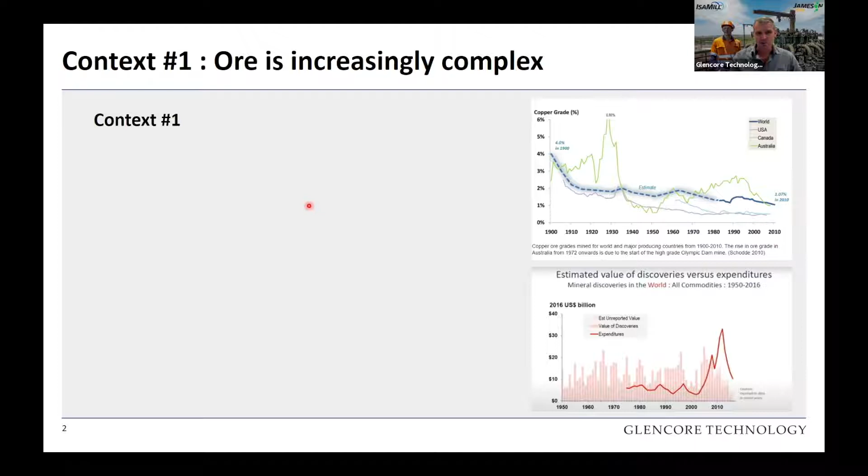We know that a lot of the easy, low or high grade accessible ores have already been mined or are currently being mined. What we also know is that the current stocks of known, undeveloped ore bodies are becoming more and more complex. If you look at this graph, you can see that since the 1900s, the grades of copper globally have been decreasing, and this is adding to the need to look at higher throughputs to try and maintain the same metal quantities.

We also know with this type of trend moving forward that the future will be lower grades, deeper and larger capacity, and also bigger footprints.

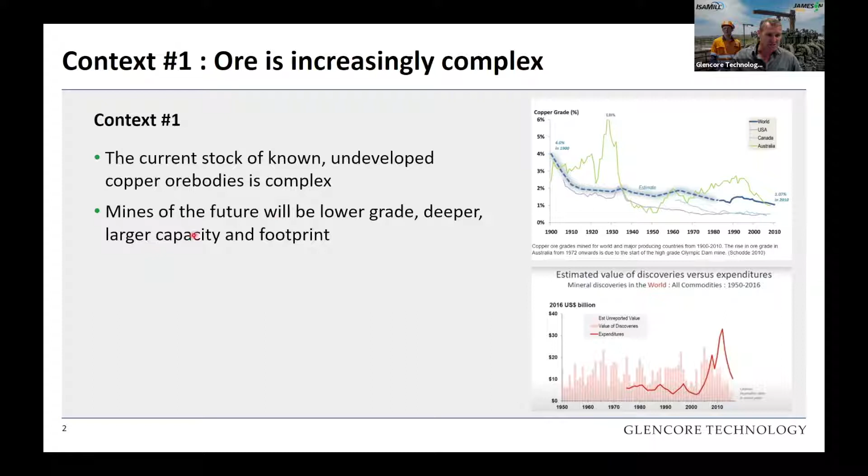We also know that the mining industry has capitalized on the rising metal prices, and with these larger plants, the higher prices often overlook the environmental and even the social costs. You can see here on this graph showing the value of discoveries in recent times - it's heavily depleting, and this also follows with the expenditure.

So what this also cements is that the problems we are facing in the future in mining are becoming greater and greater.

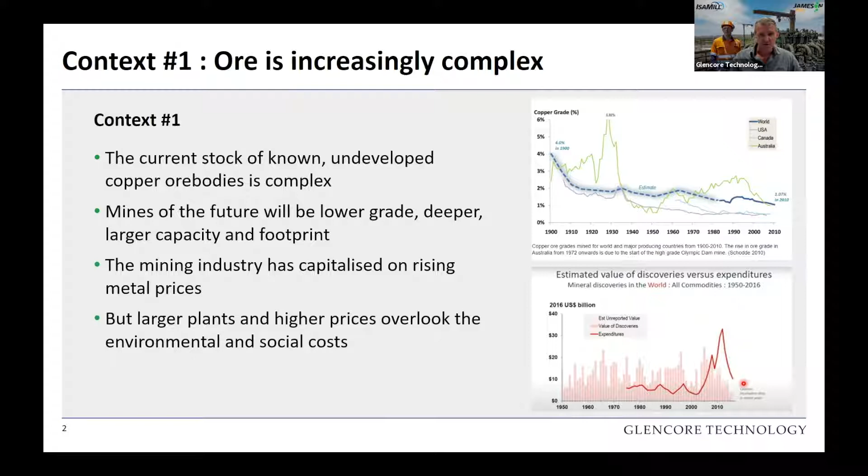The other point is there is a lot of pressure and trends in the industry to look at the environmental impact and also to reduce capital. A number of large firms such as the World Economic Forum and Deloitte have stated that there's a lot of pressure on stakeholders for less environmental impact.

Deloitte talks about the trend towards production in a sustainable way and also demand for environmental and safety performance. We know that since the lockdown from COVID, there's been a sharper focus on carbon emissions with predictions of up to 17% down in April, and also demand for less capital and less OPEX.

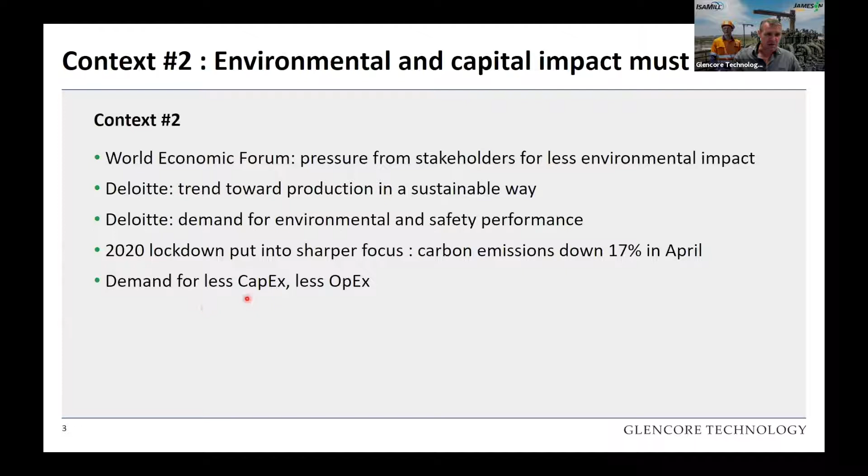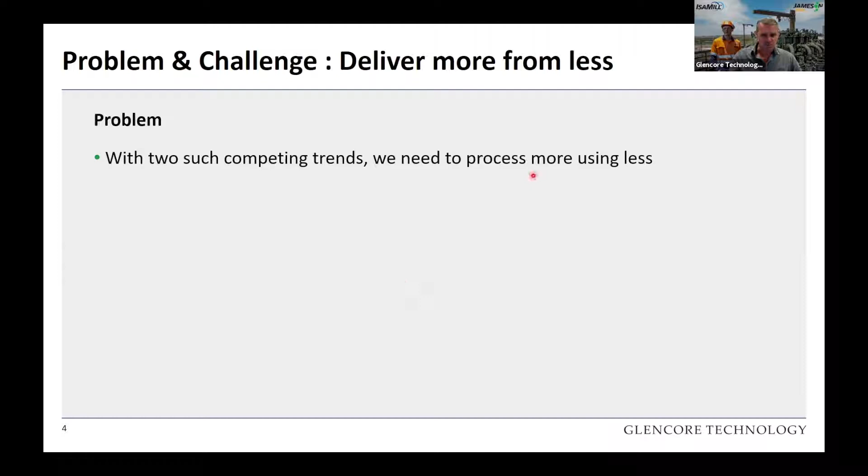So what is the problem and what is the challenge? The problem is twofold, and it really talks about the two trends I just mentioned, and also how we need to process more for less. So the challenge is to innovate the milling, flotation, and the circuit as a whole, and also to process the same or greater throughputs using less equipment and less energy.

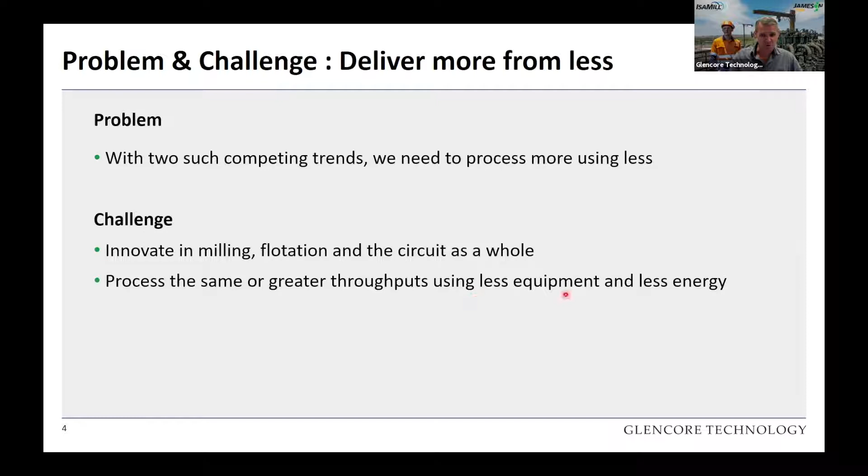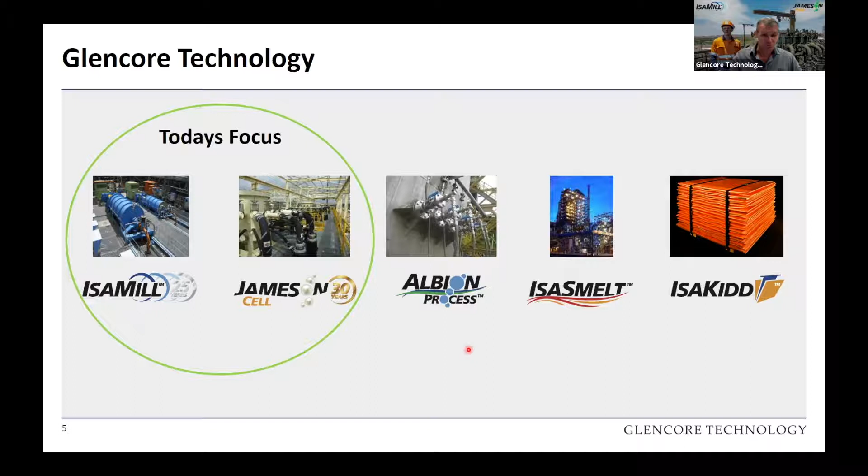Glencore Technology has been around for a number of decades, and we have 5 core technologies which we have been marketing and delivering into the mining industry for many years. The two that I want to talk about today are our mineral processing technologies, which are the IsaMill and Jameson Cell.

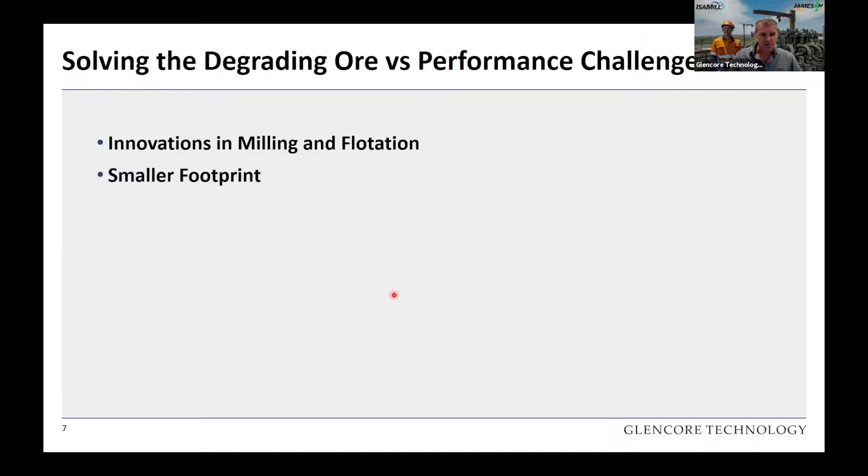So today we talk about the full circuit application and some of the innovations that we have now moved into. The first part is where we're trying to move to solve this problem, and this is around innovations within our milling and flotation technologies - looking at smaller footprint, lesser energy, and increased throughput.

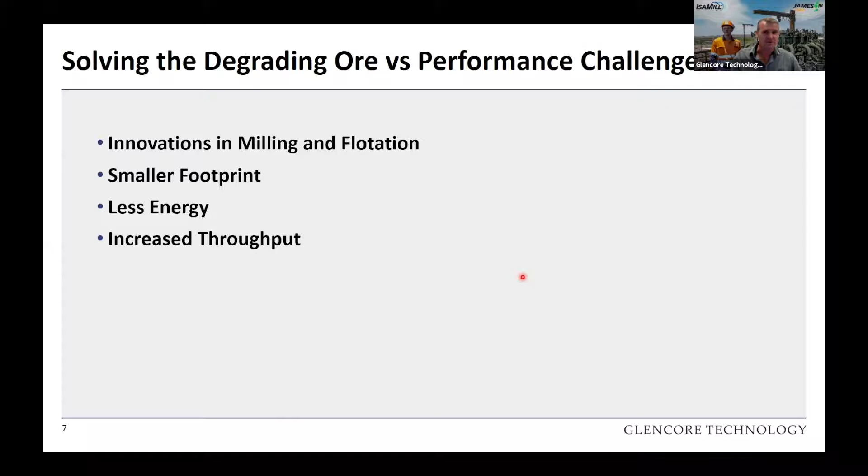So these are the types of things that we've taken on as a challenge to solve. How have we done this, and how are we now taking these things into practice? I'd like to introduce a new project which we have recently been awarded.

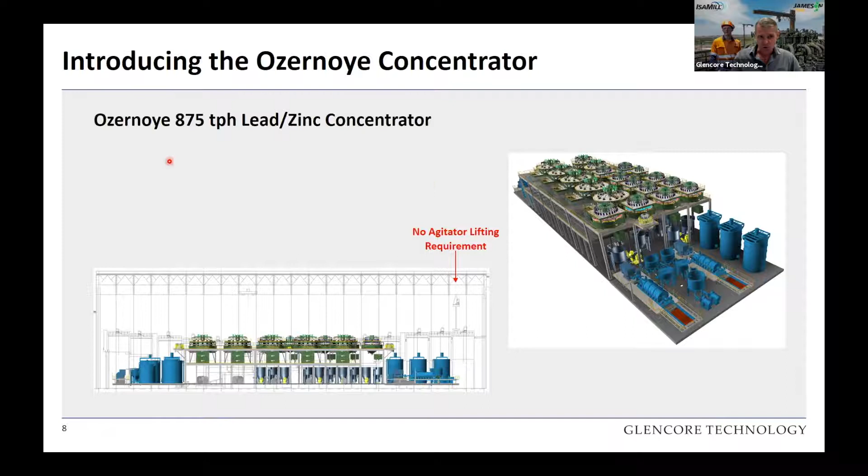This is a large lead zinc concentrator, 875 tons per hour in Siberia, Russia, called Ozernoye. This circuit is potentially the largest lead zinc operation to come online in the last 40 years, so it's a significant addition to the market.

It replaces 63 conventional tank cells with 19 Jameson cells, so it's a complete 100% Jameson cell circuit. It reduces the footprint by over half, and it also reduces the power by half.

As you can see here, these Jameson cells have no agitators, so there is no need for lifting inside buildings. This means the height of the building and craneage in this case was 15 meters lower, so there's a lot of savings, not just in footprint, but also in the height of the building.

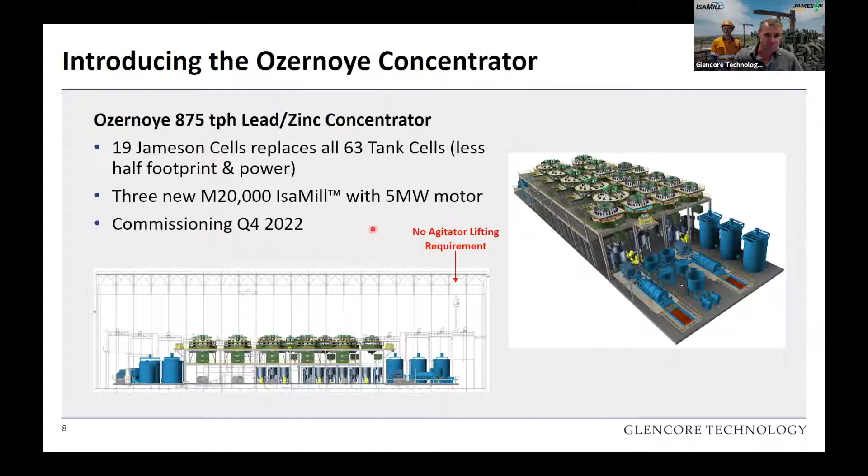Another big thing for this project is the introduction of a new IsaMill to our models. This is an M20000 IsaMill, and there's 3 supplied for this project, now supplied with 5 megawatt motors. This circuit will be commissioned in Q4 2022, next year, so it won't be long before you see this actual plant up and running.

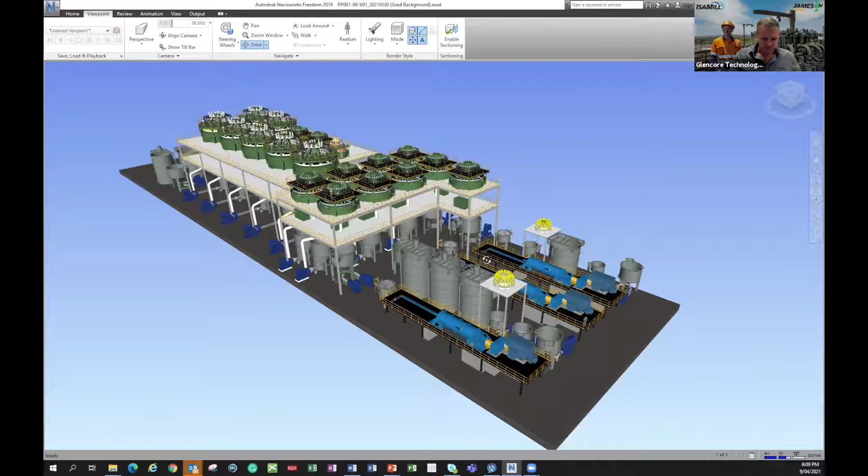So this is the circuit here. As you can see in the front, this is where the 3 M20000s are positioned. Towards the front end here we have the 2 rougher scavengers in the lead, followed by lead cleaning. And then we have 5 of our large zinc and pyrite rougher scavengers with a very high mass pull of around 55%, floating a lot of the pyrite out as well. Then the fine grinding goes down to between 10 and 13 on the zinc and 10 and 7 on the lead. The circuit in the back end here is basically the pyrite rejection and the upgrading of the zinc concentrate.

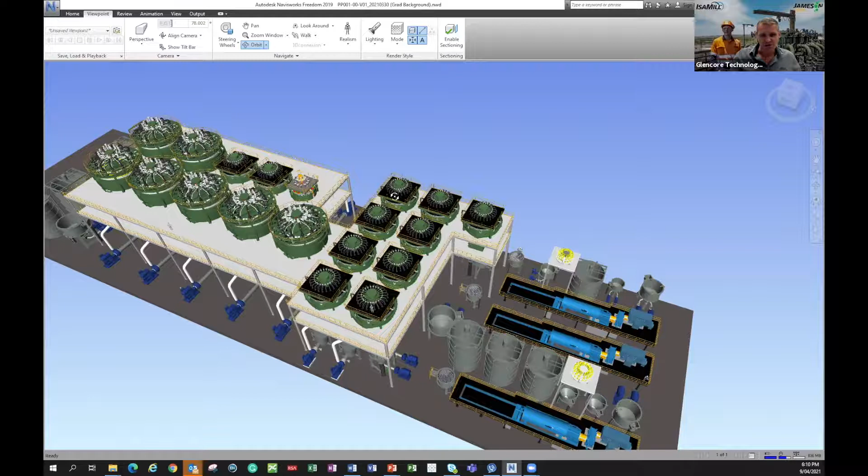I wanted to also quickly mention another circuit which we will be bringing online later this year. This is again a 100% Jameson Cells circuit, which goes from 11 conventional cells replaced by 4 Jameson cells. So it's a smaller circuit, it's 70 tons per hour, but again it's on that similar sort of principle where it's less than half the footprint. So a big reduction in capital and a big reduction in the footprint and savings around that area. Commissioning is in Q4 this year.

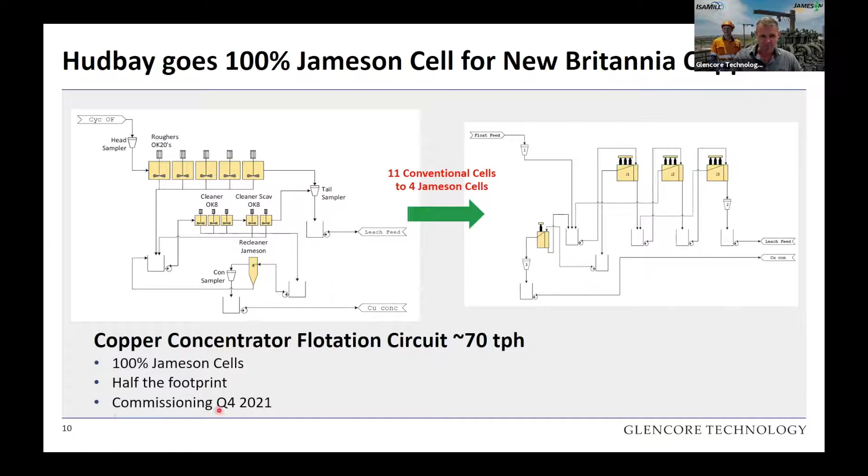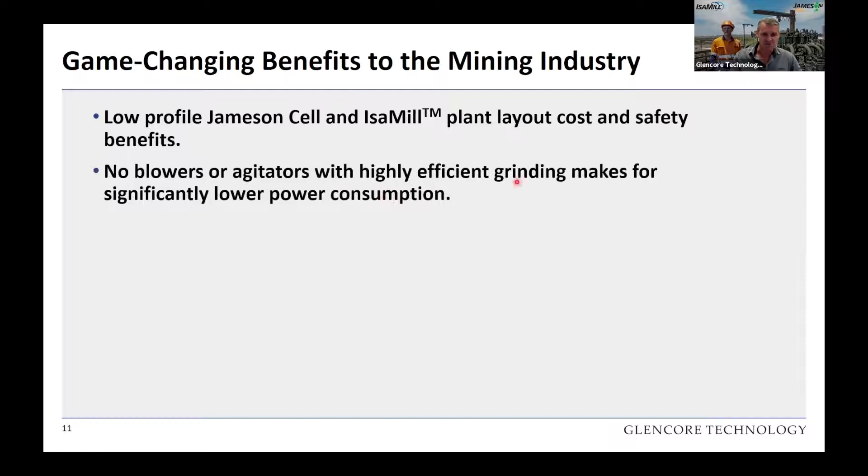So what does this mean for the industry, or what do we believe these sorts of circuits now represent to the industry? We see that the low-profile Jameson Cell and IsaMill plant layout have major cost and safety benefits. Reducing it to the ground is no longer working at heights, a lot less of those sorts of safety concerns. There's also no blowers or agitators, and with a high-efficiency grinding, makes for significantly lower power consumption.

We also see more than 50% footprint savings, meaning significant capital savings. And also significantly less equipment means less spare parts and maintenance requirements, which means in a sense less OPEX cost.

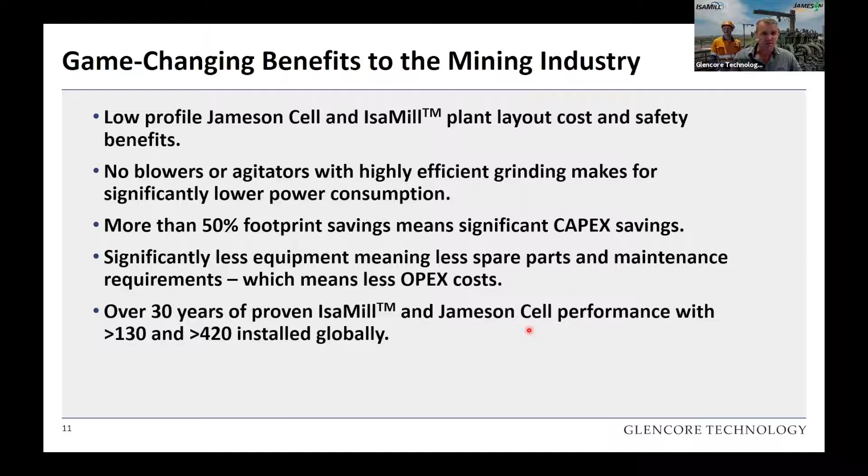And over the 30 years really of proven technology, so the IsaMill and Jameson Cell, we now have over 130 IsaMills and over 420 Jameson Cells. So it's a very proven technology in many applications around the world. And really the circuit and equipment operationally is very simplistic, so it means that you get consistent high performance.

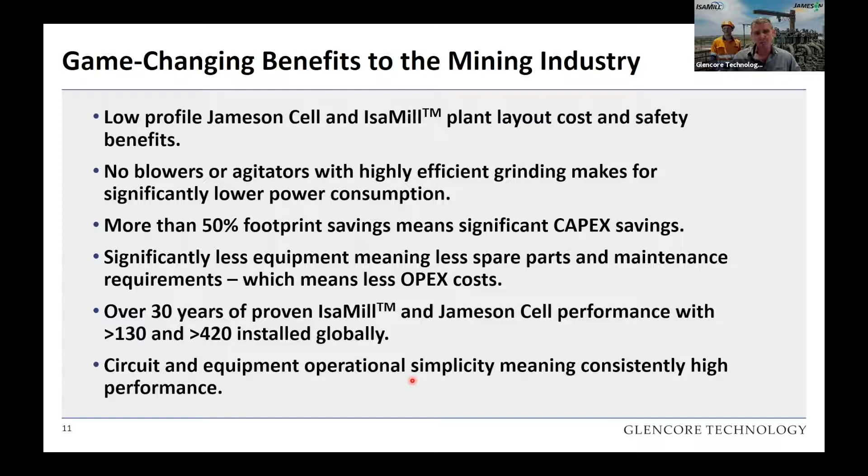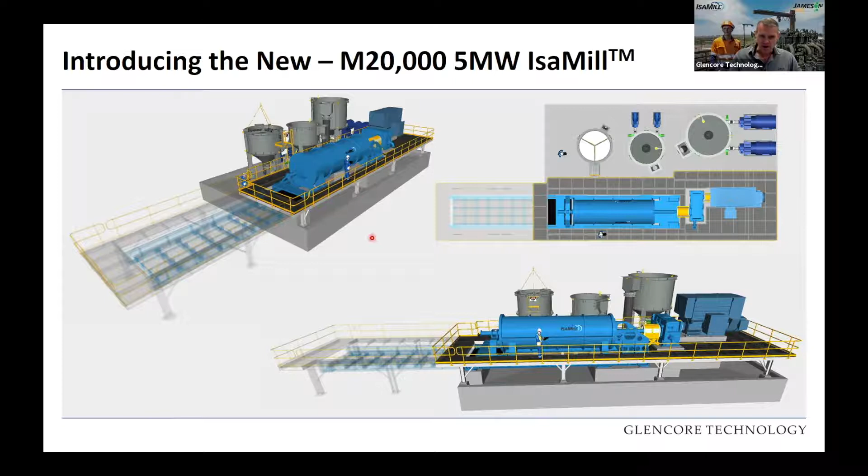So some of the developments of these technologies in recent times and how it's enabled us to get where we are today. As I mentioned earlier, this is our new M20000 IsaMill, the 5 megawatt motor. You can see here just a quick layout and the new low profile, and also this removable platform. A bit more detail around that.

This is our old design here, and some of you will be quite familiar with those out in the industry. These are where we have the ISA charger underneath the mill, and also on a high sort of structure up to 5 meters high. What we've now moved to is a much lower platform. We've moved the ISA charger and tanks to the side, so it means we can bring the IsaMill right to the ground. In this case, it's down to 1 meter above the ground. The platform here is also removable, so whilst you're not actually doing maintenance on the mill, you can use this laydown area for other parts.

The reduced footprint and the reduced height also means no working at heights, so a lot of safety benefits there as well. When you take this all into account and lay this out in front of a typical vertical stirred mill, you can see that we sit within their footprint on the ground, but obviously have a lot less height worries. So there's no working at heights and there's no working under loads.

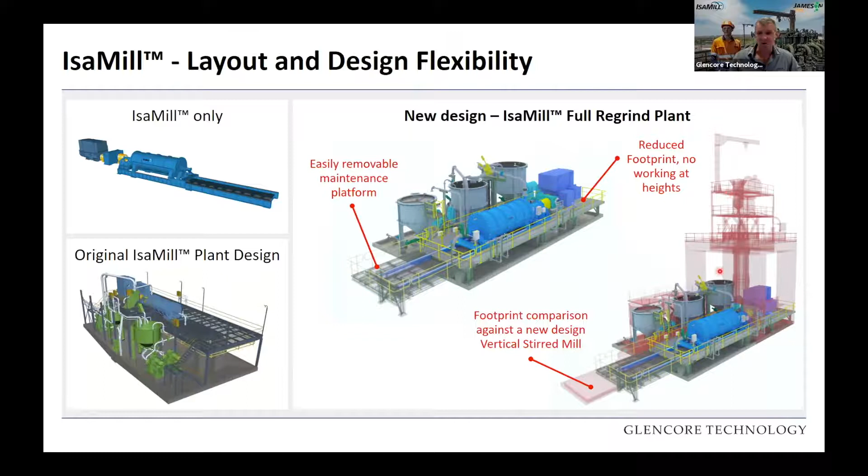One of the benefits there with going up in terms of the size of our IsaMill models, as you can see here, is that as we go up in size, it's delivering more energy per unit area. So what this essentially means is that you're getting more throughput with less footprint.

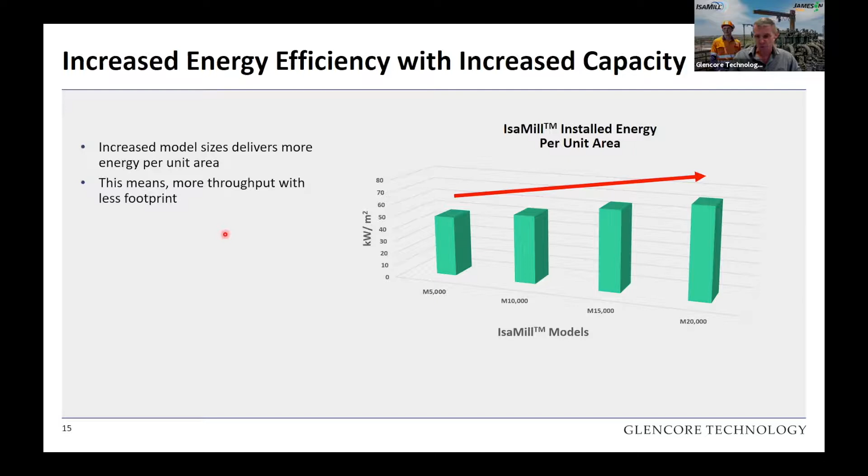Some of the stuff we've been doing with the IsaMill in particular is a lot of R&D, extensive R&D over the many years. We've trialed many types of different compounds over the last 25 years, which has resulted in a world-leading understanding of best practices. We try many different rubbers, and we understand exactly how they wear and how they basically run in different applications, whether it's gold, whether it's the type of abrasiveness of it. So we have a very, very good understanding of what's best for each individual operation.

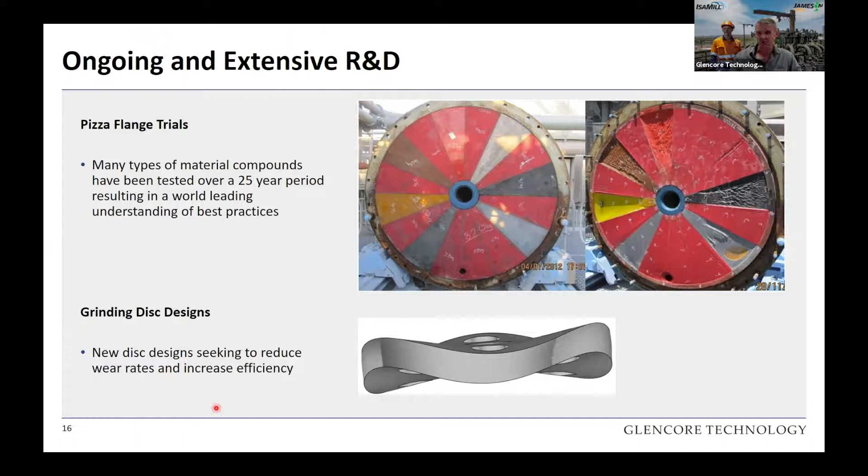We also have done extensive work on grinding disc design, looking at ways of reducing wear rates and also looking at increased efficiencies.

If we look at our marketing, we've got a very strong global presence and we're expanding. We've continued to develop new products, and also have very good support to Glencore sites and our other partners and suppliers around the world.

New models have been brought online, and a lot of that is from listening to feedback from clients. We understood we had some gaps in our sizes, so we made sure we developed new ones to try and fill those gaps.

The Red Dog has just been commissioned successfully - this is the M15000 in Alaska. We'll also obviously be commissioning 3 of the M20000s next year.

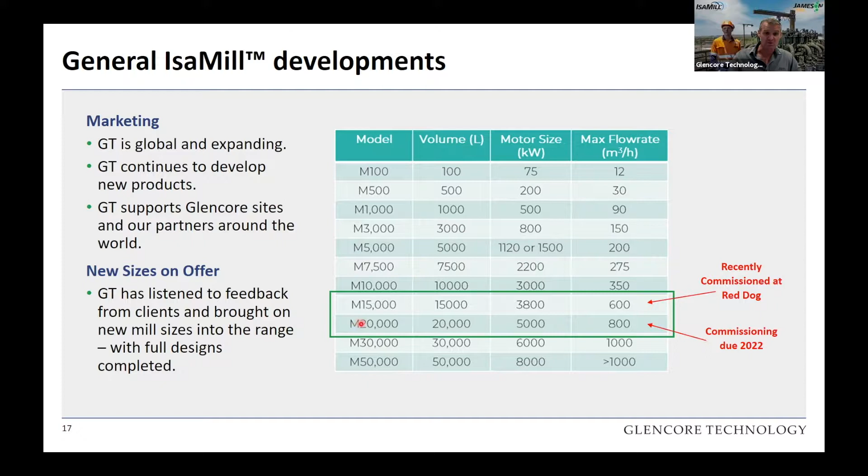Just going to quickly touch on the Jameson Cells. This is obviously a big enabler with our technology in the full circuit. We have now developed a new 8512 downcomer cell.

This unit pretty much doubles our capacity compared to our old B6500 designs. It now means we can treat up to around 1,500 tons per hour in a single unit, which really opens the door to very high throughput, low grade applications.

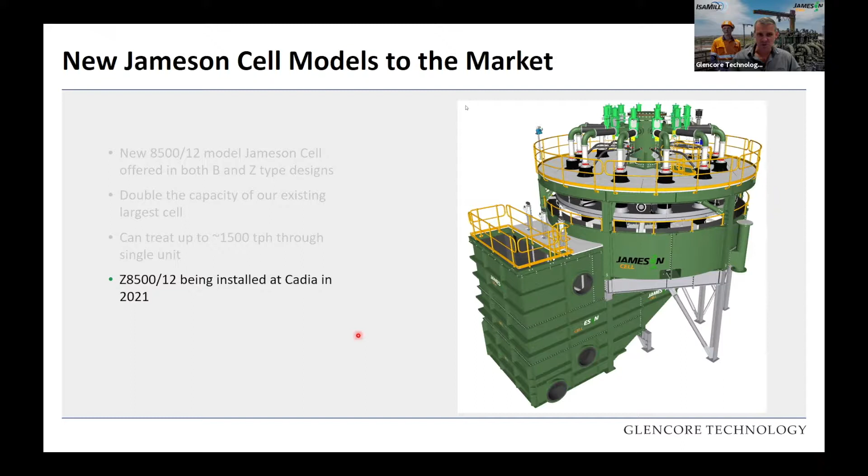This unit itself is being installed in Cadia with Newcrest later this year. This will be a great thing for us to commission.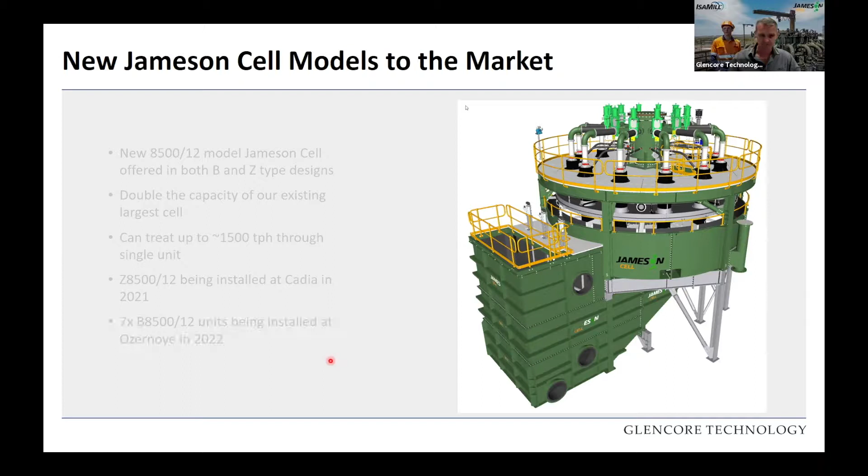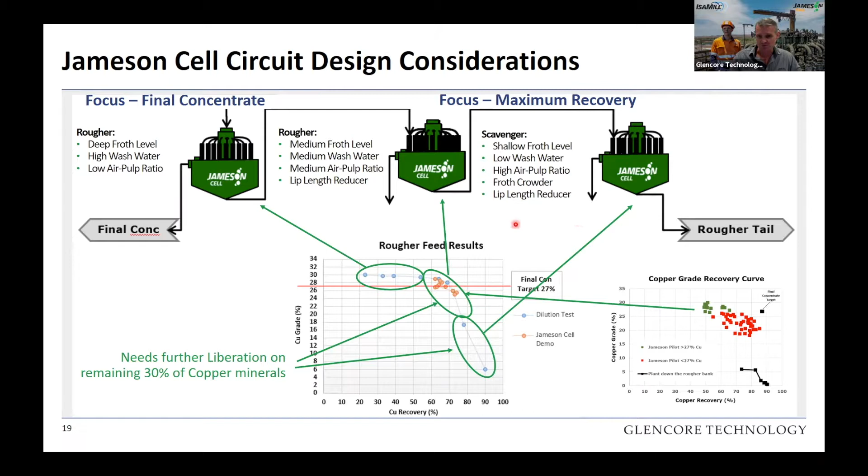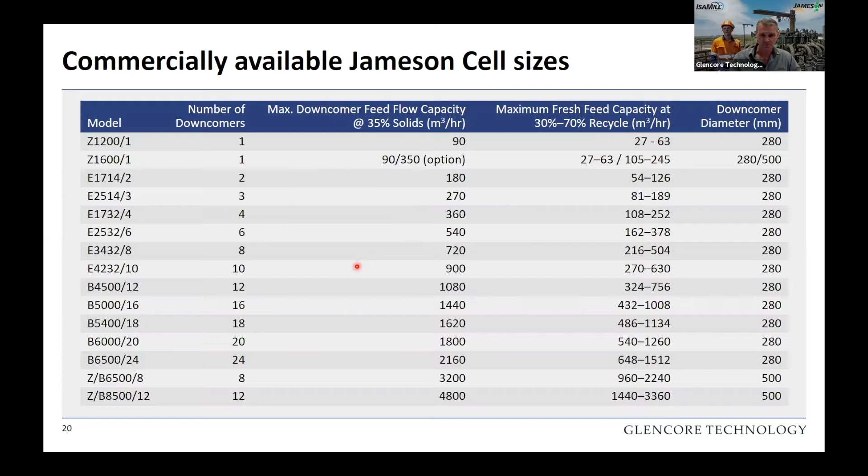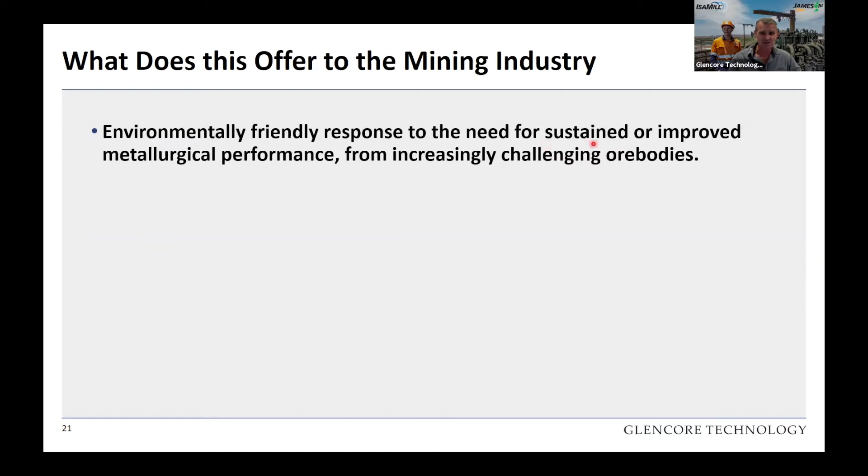So what do we believe this now offers to the mining industry? We believe it offers an environmentally friendly response to the needs for a sustained or improved metallurgical performance for increasingly challenging ore bodies.

It significantly reduces CapEx and OpEx, improving the financial viability of treating low-grade and high-throughput applications. It also simplifies the flow sheet and operations, delivering high performance even in regions where resources may be limited or locations may be hard to get to. It also reduces energy requirements, which helps in locations where there may be power limitations.

And we see this as actually a major step change for the industry.